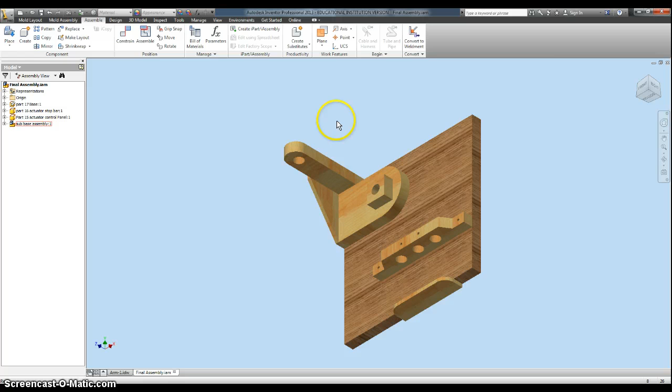Alright, so now that we have the first part of the base done, we're going to keep going and add the arm. So we're going to go to place, and the first piece we're going to bring in is going to be part 4, the pivot rod.

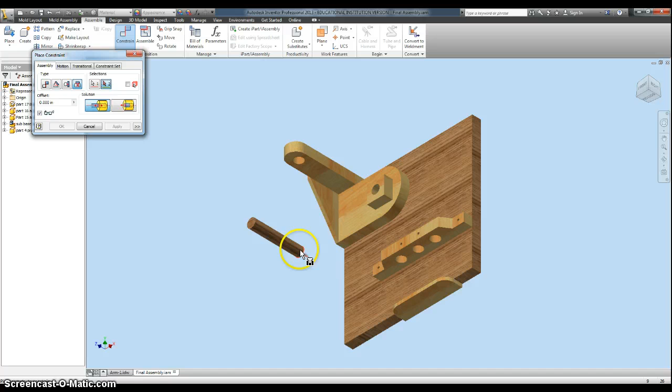Now we're going to do an insert constraint for this. So we go to constrain, select insert, and we want the bottom of this rod. I'm going to click on the bottom half of the rod, then rotate our base until I can see all the way in the bottom here. See how you can click on either the top, the middle section, or the bottom? You want to make sure you're clicking the bottom.

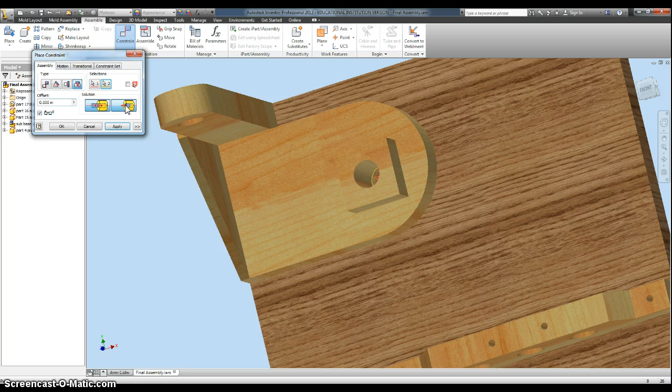Now mine went upside down, so the way to fix that, and you're going to have to do that probably a couple times here, is by selecting this aligned button. So if you select the aligned button, it goes back up where you want it.

Alright, so now the next piece we're going to bring in is going to be the yoke base assembly that we already made. So I click on place, yoke base assembly, and then drop that in.

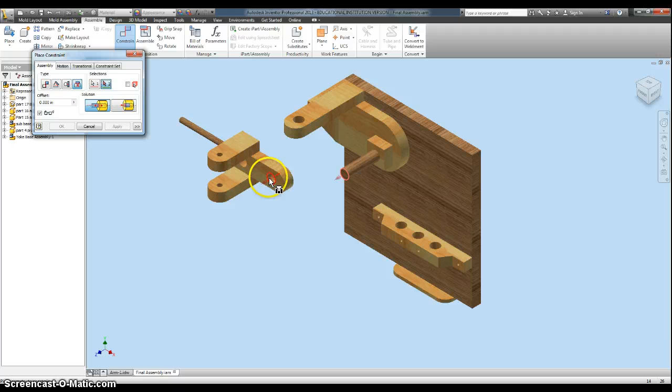We're also going to do an insert on this. We're going to go to constrain, insert, and this time we want the top of the rod into the top of this back hole. There's a front one and a back one. You want to go into the back one. And again, mine went upside down, so I'm going to hit that align button to get it the right side up.

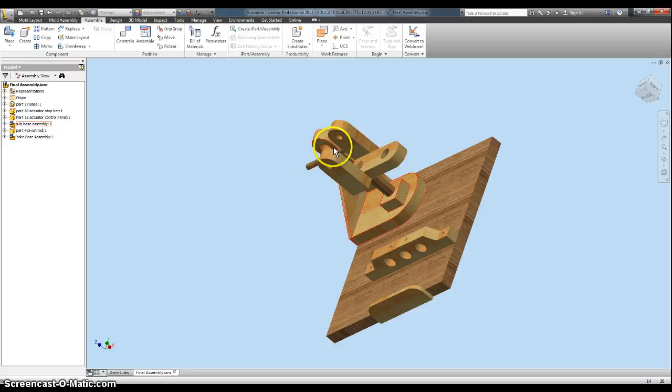Alright, now we're going to put in the arm. Before we do that, we're going to insert a rod here. That's going to be our part 21. So I go to place, the part 21 rear pivot rod, drop that in, and we're going to do the same thing.

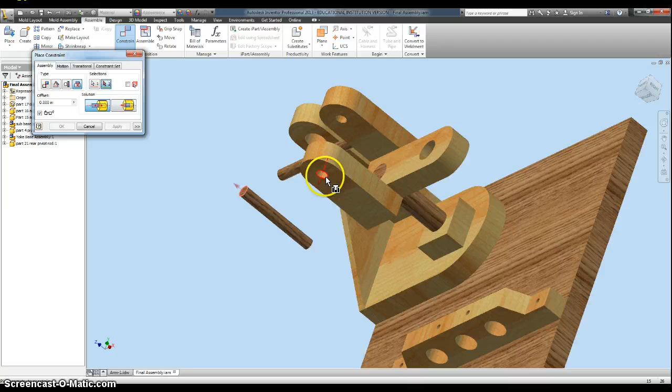We're going to use a constraint and an insert, and we want the end of this rod into the back side of this hole, and you can see it's coming out the wrong way, so I hit align to get it to go the correct way.

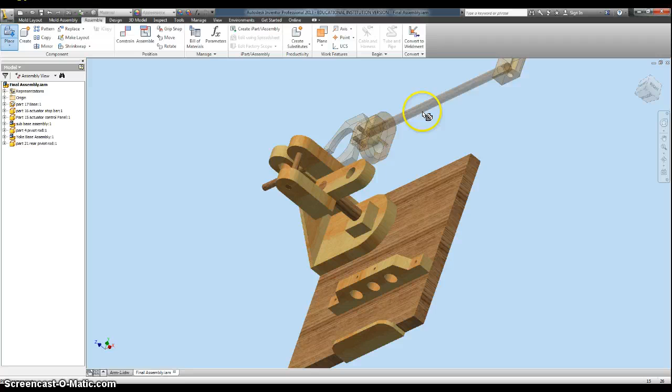Alright, almost done, we're just going to put our arm on. So we click on place, and we bring in our arm assembly. And I'm just going to kind of move it so it's sort of close to our yoke assembly here, and zoom in just a little bit.

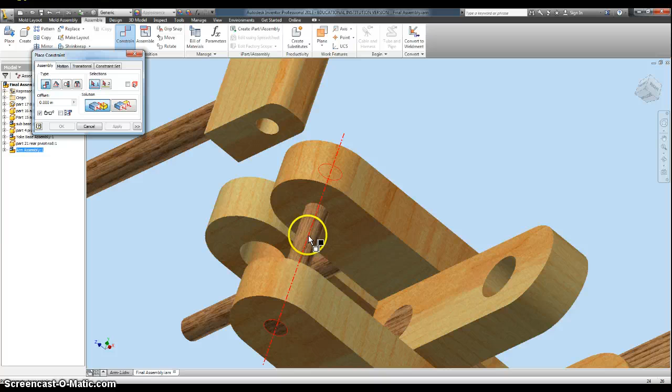So to attach this is going to be 2 constraints. So I click on constrain, and we're going to do the center of this rod and the center of this hole. So that gets it in there, but it can still slide back and forth.

So we want to stop that. So the second constraint is going to be the flat part of this arm here to the side of our the yoke assembly.

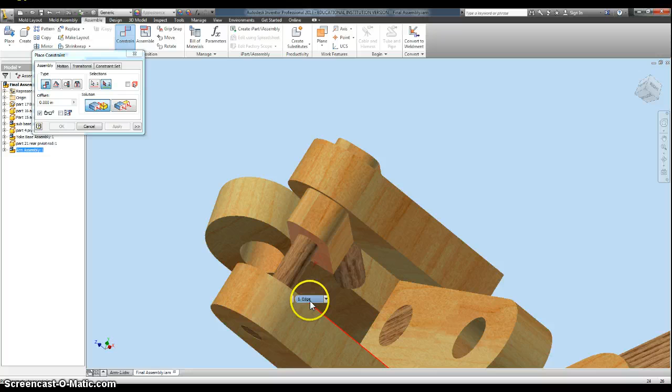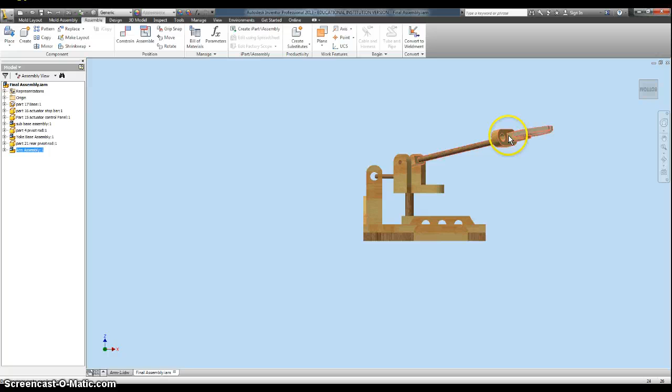Alright, now I'm just going to click on my view cube here and get a nice flat view so that I can flip the arm around. Now when you're moving this arm, it might get kind of shaky, it might move kind of fast when you're trying to adjust stuff. Alright, so here's our arm.

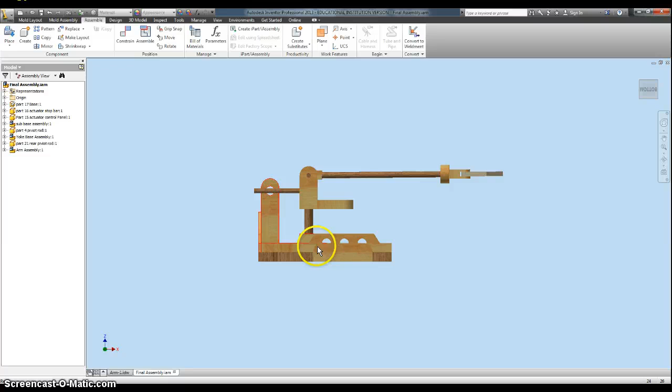There we go. Now you're ready to go ahead and put it into a drawing. Now to put it into a drawing, you want it to look similar to mine. So we're looking at a nice side view here. We have the arm coming straight out, something like this. The arm can be a little bit lower, a little higher, but you want to keep it in this general position. So now I'm going to open up a drawing, get rid of the ANSI large.

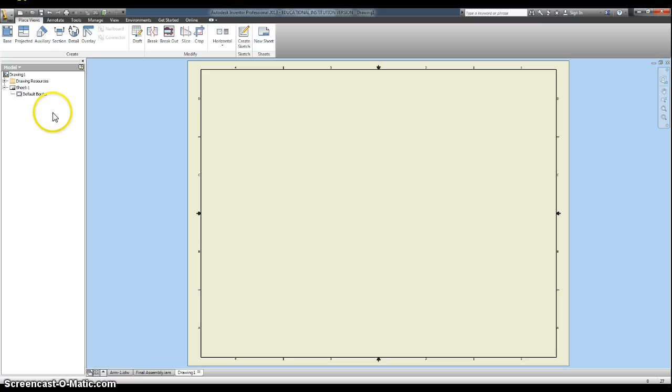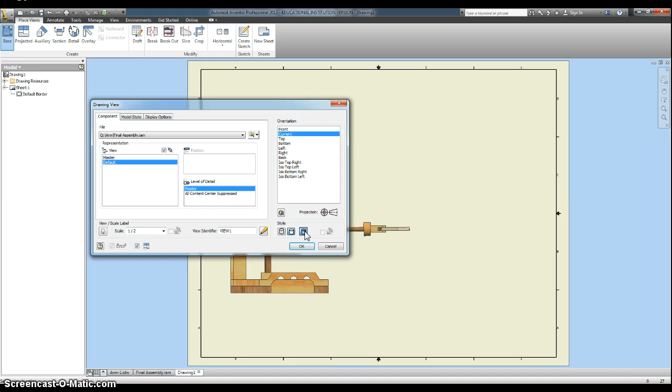Then I'm going to bring it in. So as you can see, when I bring it in right now, it's huge, so we're going to have to adjust the size. So we're going to go to scale here, and half is pretty good for this. We want to use the current orientation so that it looks like the way that we just adjusted it. We want to make sure that it's in color, and we want hidden lines removed.

So I'm going to drop it in this bottom left corner, and then place one in all 4 corners. Right click, create.

Alright, now for this one you do not need to put in dimensions because it would be just too many things to measure. But we do want to put our name on it. So T for text, click where you want your name to go.

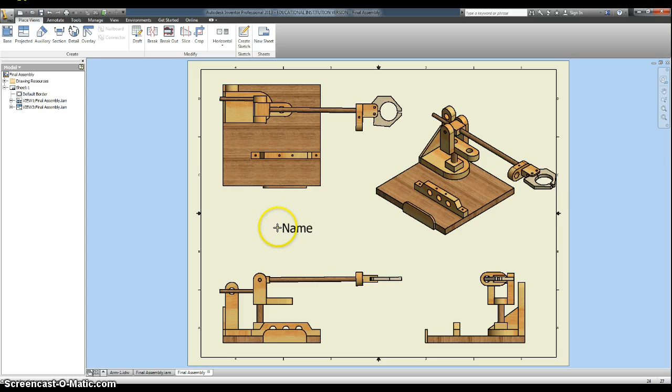And remember, before you start to type, like I typed first, I should have changed the size first, but I didn't, so now I'm going to highlight my name and then change the size to 0.5. But it's a lot easier for you guys to change the size first and then start to type.

So there you go, that is our drawing. So now you're going to just turn it in on Canvas, turn it into the arm section.